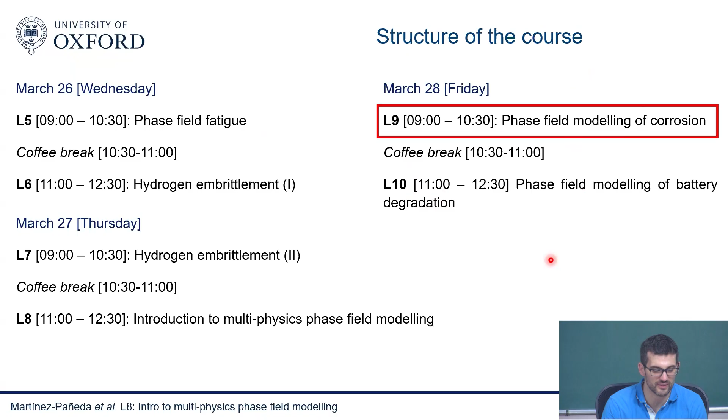Okay, so the motivation is clear. I think you all probably heard about corrosion. I have a lot of corrosion on my bike, and I've seen a few bikes corroded around here, so you probably have the same issues. So it's really, as I like to say, everyone's problem. Corrosion is a problem for all countries and all the people living on this planet. It has a massive societal cost. Globally, I think it's 5% of the GDP or something like this. It is quite a big number.

And the key point here that I want to emphasize is that it's a long-standing scientific and technological challenge. We've been working on this for a long time, mostly from an experimental point of view. We learned a lot about corrosion, but we still don't have ways of predicting corrosion failures. I always say that corrosion is a problem that has eluded computational scientists. We somehow understood some things about corrosion, but we're still unable to develop a predictive model that can tell us when corrosion failures will happen. This is the challenge. Even though we learned a lot, we haven't fully cracked this problem.

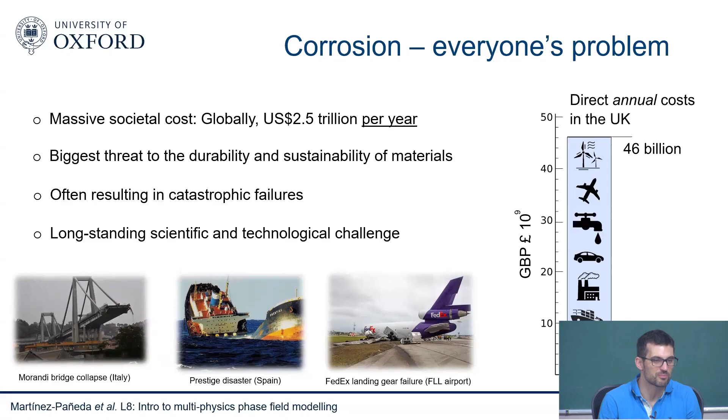This happened, for example, in Italy a few years ago, the Morandi Bridge collapse. So this is important. Again, corrosion is a problem that affects everyone. It doesn't matter how technologically advanced your country is, or your technologies are. You have corrosion failures, people die, and these things happen all the time, everywhere.

And the challenge here is that, of course, or one of the challenges, is that we need to extrapolate from the data. So what you see here in the sketch is the time to failure, and here's some sort of measure of the intensity of corrosion. It could be corrosion current density. And often, of course, things can fail over decades, as it happened with this bridge in Italy. But in our lab, we cannot do experiments over decades. That's far more than what a PhD student is willing to stay for.

So then we need to do accelerated tests. This is what we do. So this is our impressed corrosion current test. So this is an example of a classic accelerated corrosion test. So you basically enhance or maximize the severity of the corrosion process. For example, you are running tests at very high corrosion current densities, and therefore you get corrosion happening much earlier. But then you need to extrapolate all the way from here to here, and it seems that we keep overestimating when corrosion will happen, because it's a big extrapolation that we do there. So that is one of the main problems. We need to go from very fast experiments to other time scales.

And of course, the way we extrapolate is we get a bunch of data points, and we fit the data. So you can imagine here a time to failure versus applied current density as a function of two fitting parameters, alpha and beta, that appear magically there, and that we just calibrate with experiments. But we don't know what alpha means, we don't know what beta means. We just pick units a bit randomly. So this is the problem, right? It's not as easy. If we want to extrapolate from here to here, then we need to capture the physics. We need to understand what physical phenomena will be slowed down or accelerated as we lower our corrosion current density, and see how these things evolve in time.

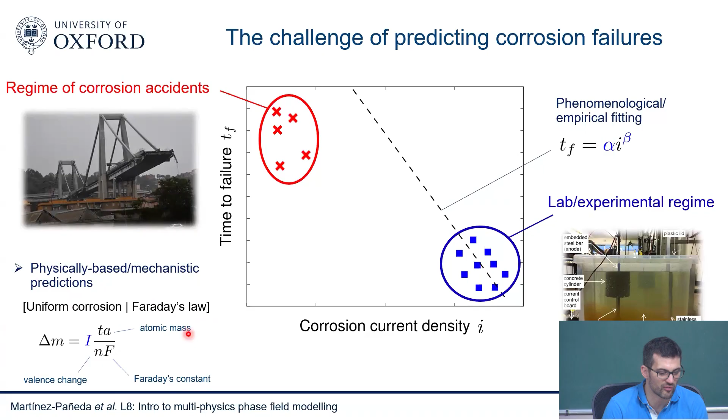So that's the challenge. We know that we need to replace these things by these things. We need to develop physically based predictions, but we need to develop physically based predictions for problems that are much more complicated than this one, right?

So the key takeaway is that, if you want to predict corrosion failures, if you need to extrapolate from here to here, then you need to explicitly resolve the underlying physical processes. You need models that rely purely on material parameters, physical parameters that you have full understanding with, and that will give you the confidence to go from a lab experiment that takes a few hours to a failure that occurs over decades. That's the idea.

That's the key takeaway. So, as I said before, what seems clear today is that we all seem to be in agreement, and everyone you ask in the corrosion science community will agree with you and say, okay, yeah, that's true. If you want to predict corrosion failures, you need to incorporate all the physics of corrosion. You need to develop models that do not rely on fitting parameters, because the fitting is going to take me to the wrong side, because different mechanisms are activated at different locations. There's rate-dependent phenomena and so on.

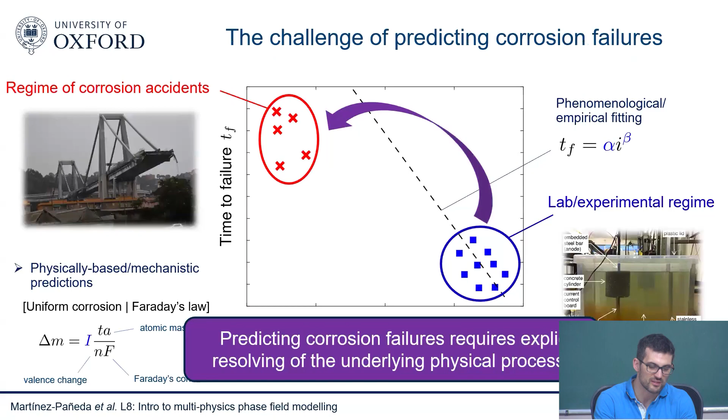So this is not going to work. The fitting is not going to work. We need something a bit more rigorous, a bit more mechanistic. This is the takeaway. So we need to be able to do that, and in order to do that, well, you need to resolve the physics.

So you think that a lot of things are happening. So you have some sort of electrolyte. It could be seawater. You have your metal, which is being subjected to some mechanical deformation. So there's mechanics in there. In the electrolyte, you have many ionic species that are diffusing through your electrolyte, similar to the hydrogen uptake problem that I was discussing in the seminar. You have many ionic species. Those species are moving around due to fluid flow, due to electromigration, due to diffusion.

There's an interface, there's a defect, some sort of defect, a pit, a crack between the electrolyte and the metal. There's a lot of things happening at the surface of that defect. You may have corrosion reaction, so you have metal ions being detached from the metal and moving away into the electrolyte. You may have absorption of hydrogen. We discussed this in the seminar. Hydrogen comes in and travels through the crystal lattice. It's attracted to areas of hydrostatic stress.

So again, everything is strongly coupled. The corrosion process, the dissolution of metal, is also impacted by the mechanical fields. You may have a passivation layer here that you're rupturing through your mechanical fields. So there's many, many things happening, all of them strongly coupled, and this is the challenge. This is the problem with corrosion. Many things are happening across disciplines: electrical fields, mechanical fields, chemical fields.

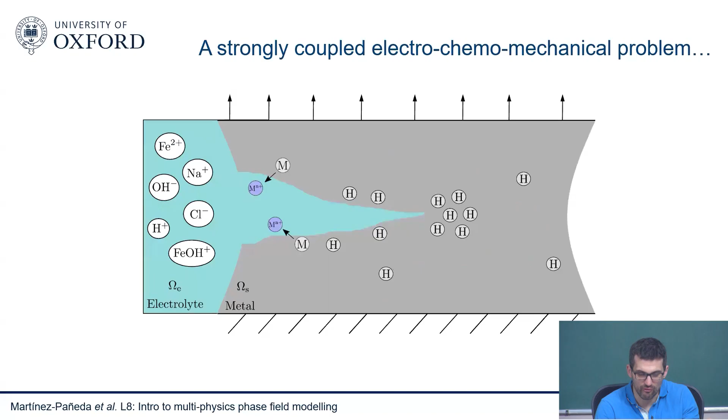And the good thing is that we know what are the differential equations that describe each of these phenomena. So the electrochemical community knows very well how to describe the electrochemistry of electrolytes. We discussed in the hydrogen seminar, they use Nernst-Planck and electroneutrality or Gauss law. So here you see the Nernst-Planck equation, for example. You can predict the transport of each of these ionic species, and each of them will be a degree of freedom in your finite element model.

So models can be a bit big, but you can see then you have the change in time as a function of transport due to fluid flow, diffusion, electromigration, and volume reactions. So these are well known, and these rely on parameters that we understand: diffusivity, temperature, Faraday's constant, and so on and so forth. So everything is physically based, mesoscale physically based. You're explicitly resolving the phenomena at play. And then you have some surface reactions as well, the formation of the material, hydrogen transport, whatever you need.

So we know each of the equations that describe each of these electrochemomechanical physical phenomena. And for the first time, we have enough computer power and coupled multiphysics algorithms that we can solve all of them. So we don't need to make any assumptions.

I was going to say that we didn't have any models for corrosion. That's not completely true. In the nuclear community, because they had to make some predictions, they used some sort of models, but they were all alpha-beta type of models. Not one there to resolve the electrochemistry, not one there to resolve surface reactions. It will be more: you apply this load, and then as a function of this time, something will happen. A little bit along those lines.

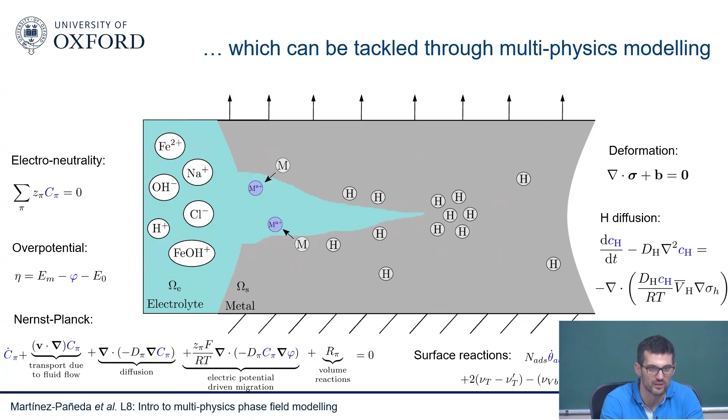Everything is very strongly coupled. So the way it changes in time will change the value of these guys, the value of the electric potential, the corrosive reaction, the uptake of hydrogen, and so on and so forth. Everything is very strongly coupled. Everything is important. You cannot just neglect one of these ingredients. In order to predict corrosion, you need to have everything in place. And you can see this here.

So this is, as I told you yesterday, the main issue with the durability, or the service life, of offshore wind turbines: corrosion fatigue. This is the limiting factor. And what happens typically is that you generate some pits at the interface between the electrolyte and the metal. Those pits will grow, driven basically by local chemistry and mechanics, and then eventually you get a pit-to-crack transition event, and then the propagation of fatigue cracks.

You can see here a microscope image, solid metal, the aqueous electrolyte, how you start with a pit and then eventually it becomes a crack. And this is a challenge because you can see that you have a very complex corrosion front, and everything, as I said, is strongly coupled. So as you know, of course, you are very familiar with mechanics. The sharper my pit is, the higher the stresses I will have ahead of my pit. The higher the stresses, the faster the corrosion will happen.

The sharper the pit is, also the more change in local electrochemical conditions I will see. So you'll go from a pH of 9, as you can see here, to 2. So there are changes of 80% in the pH and local electrochemical conditions from the bulk to the inside of the pit. So all of these things are very strongly coupled. The pit is growing due to mechanics, due to local chemistry, and the local chemistry and the local mechanics are themselves changing depending on the shape of your pit. So you cannot disconnect things. You have a problem that is strongly coupled, and you need to resolve everything that is happening there.

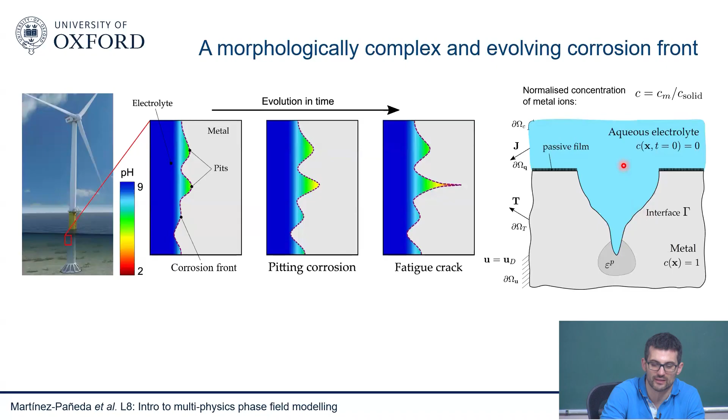But there will be a number at the interface, and they will travel along. And at the beginning, of course, you have 0 in the electrolyte. This is the quantity that you need to describe corrosion mathematically. The simplest model is a normalized concentration equal to 1 in the metal. As you generate metal ions due to corrosion, those detached metal atoms travel through the electrolyte and distribute within it.

What happens in corrosion is that we have two scenarios. One is called activation controlled corrosion. The other one is called diffusion controlled corrosion. In activation controlled corrosion, we know that the velocity of the pit is governed by Faraday's second law. So you have the corrosion current density, Faraday's constant, the concentration of the solid, and so on. This is an equation that has a clear physical meaning.

This gives you how fast your pit grows. And here you have a Rankine-Hugoniot condition, which tells you the concentration of metal ions at the interface, the CM, which you can normalize by C solid. When you have diffusion controlled corrosion, you have saturated your interface with metal ions, so you need those metal ions to go away before you continue to corrode your sample. Then the concentration at the interface is given by a Dirichlet boundary condition, the saturation concentration, a known material property, and the velocity of the corrosion front is obtained from the Rankine-Hugoniot condition by substituting the saturated concentration.

So you can see why modeling this is very challenging. You have an evolving interface where you need to prescribe Neumann and Dirichlet boundary conditions that are changing in both time and space. This is essentially a mathematical nightmare. Some people have published a few papers using some techniques, but only for very simple problems; it's really a nasty problem. So here is where we think phase field can come to the rescue and make a big difference.

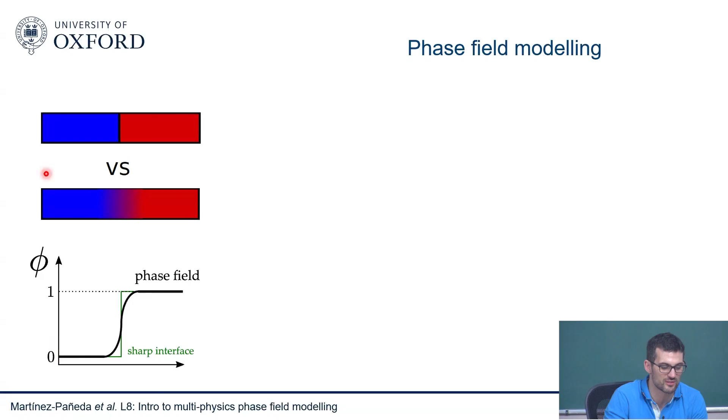But again, we can describe the corrosion front with phase field, and then if we do that, we need to think of a differential equation for the evolution of the phase field. But once that's done, we can capture the evolution of the corrosion front easily. And again, to emphasize the point, we will be solving the interface equation in the entire domain, so there will be no need for special treatment. If pits grow, branch, coalesce with each other, all of those things will be naturally captured without any need for any specific conditions, any criteria.

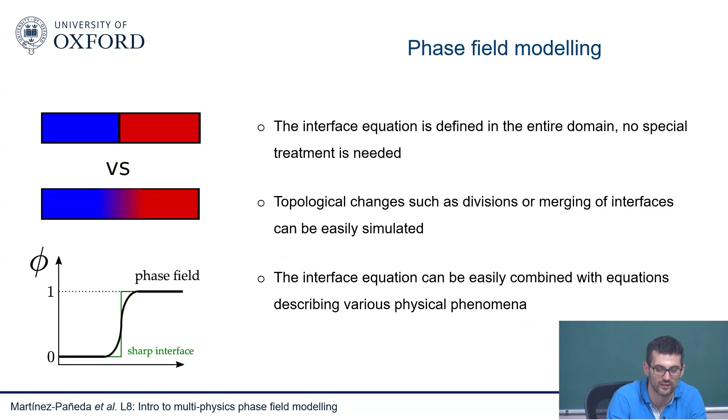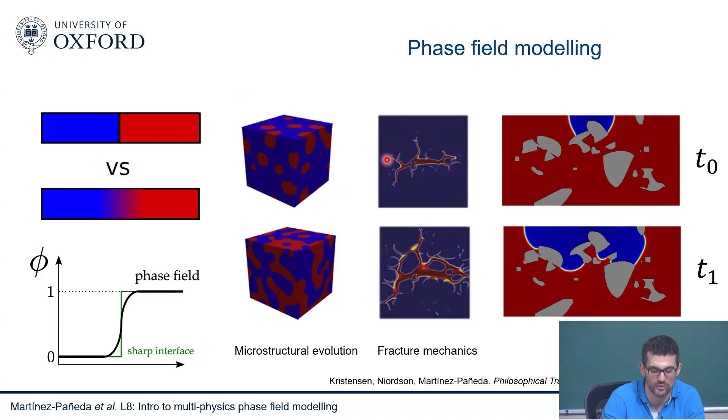And then again, critical of course to corrosion, we will be able to solve the interface equation in combination with other equations describing other physical phenomena. So we can solve it with all those equations I showed you before, right? The transport of hydrogen, the transport of ionic species in the electrolyte, and so on and so forth. And so, once again, corrosion is a relatively new application of phase field, but I do expect to see a revolution in the same way that we have seen in the solidification community and in the fracture mechanics community. So again, a good area to start working on, I think.

And then the idea is, as you see here, you have basically now the two variables that I mentioned before. So you have the concentration of metal ions, which is 1 in the metal, and then it starts going towards 0. And then you have the corrosion front, which is described by the phase field, which takes a value of 0 in the aqueous electrolyte, so in the seawater, and 1 in the metal.

And I was invited to submit a paper to MRS Bulletin, where they were putting together papers from people working on various fronts of corrosion and phase field, and they wanted me to put an application for phase field corrosion. And there I described the state of the art of the field and some opportunities for future progress. It's been growing dramatically in the past 1-2 years, but it's a relatively new field.

I think the first papers, it's a bit difficult with these things to determine what was the first paper, because there were multiple papers progressing in that direction, but probably there's one in Sweden from Per Stahl and a group in Ohio State in the US as well, more or less. I think there's a group in Hong Kong a bit later. There's multiple groups doing things at the same time. And we were, I think, the first in bringing mechanics into the picture. But anyway, a new field, I would say, but very promising and growing quite fast.

So what do you do then? You have corrosion. I'm going to bring mechanics, I'm going to bring other things into the picture, but I want to bring them progressively. So if I think of the simplest problem of corrosion, you have basically two variables that you need to solve for, or two equations. One is the transport of metal ions that I was discussing before. This is what I'm solving here. So it's a kind of Fick's law type of equation, transport equation.

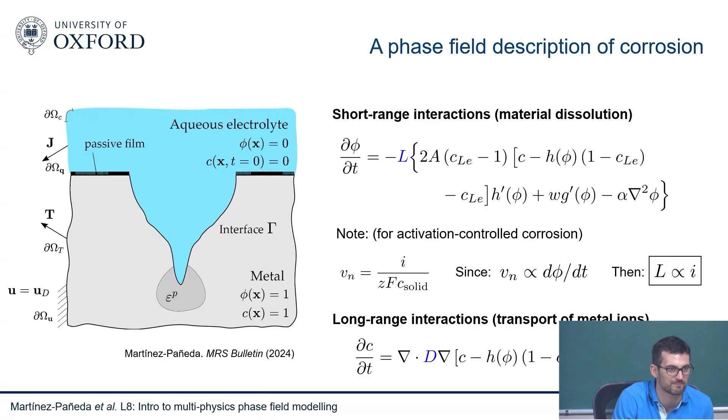So I'm going to show you a little bit how this model works, with a very classic benchmark, which is the pencil electrode test. Here you have basically a bar of metal, exposed to a solution and covered by an epoxy. So this is basically a 1D problem. You have 1D corrosion: the metal losing atoms, reducing its size, and the solution progressing. This is the outcome of your finite element simulation. We solved this with COMSOL, Abaqus, and other tools.

On the left, you see how the phase field evolves in time. It captures what you expect: as you corrode your sample, the corrosion front progresses. And this is the concentration of metal ions, which goes from the one in the metal to the saturated concentration at the interface, and then there's transport into the electrolyte, and it's zero or close to zero very far away. So this is the behavior that you expect, and in finite elements you're able to capture how the corrosion front evolves.

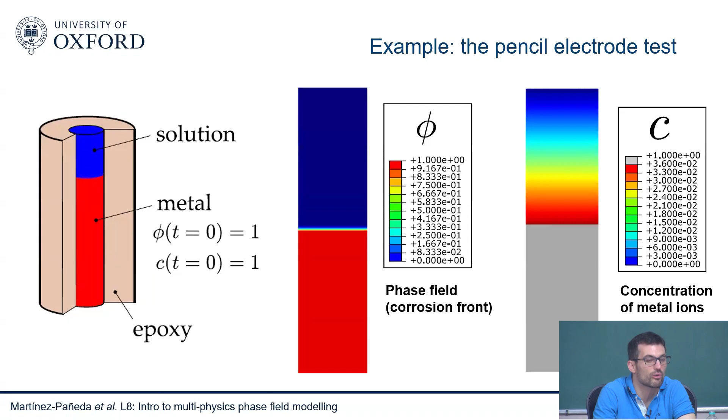And we can also show, and this is quite important, that the model can naturally capture the transition from activation control corrosion to diffusion control corrosion. Remember that we have these two scenarios. The other few models that were there, they had to have a condition where they say, oh, now at this point I'm going to switch. And this was also part of the mess, right? How do you switch these boundary conditions and so on? Here, the model can capture this naturally.

So you can see here, this is the pit depth versus time. This linear behavior is typical of activation control corrosion. But as I ramp up my corrosion current density by ramping up my mobility coefficient, you can see that you get into this parabolic behavior that is typical of diffusion control corrosion. And when you are in the diffusion control corrosion regime, you can see that the parameter that matters, what changes the predictions, will be a change in the diffusivity.

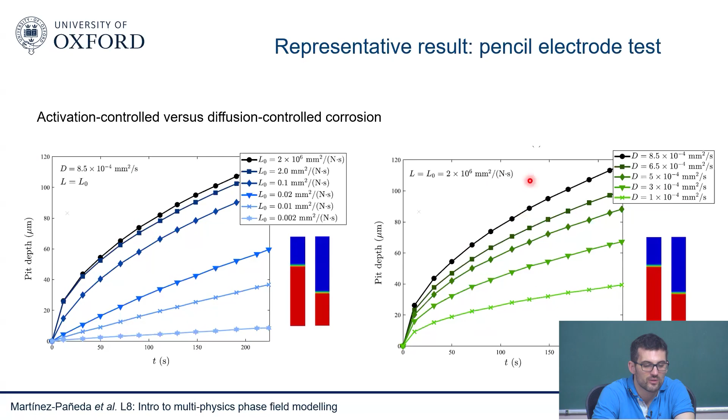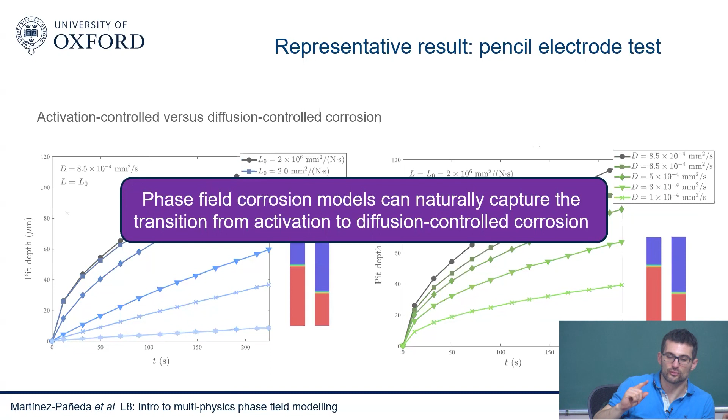This is the idea. So yeah, an important key takeaway, these phase field corrosion models, by solving these kind of Allen-Cahn and Cahn-Hilliard equations, they can naturally capture the transition from activation to diffusion control corrosion. This is an important takeaway. But then, of course,

people in corrosion, again, they said, corrosion is a very complicated problem. There's many things happening. You will never be able to solve this with computers. And they have a fair point. Corrosion is indeed a very complicated problem. But what I will try to show you over the next minutes is that these, at the end of the day, are finite element models. We understand what are the PDEs that describe, at the mesoscale in the continuum, what is happening with each of these phenomena, so we can incorporate these phenomena.

And things that people will mention, they will say, okay, from a computational perspective, this is very tricky because you need to handle secondary phases that will not corrode, insoluble secondary phases. We can do that. You can see here how this corrosion front is evolving. These are calculations from our group handling those insoluble secondary phases. They say, oh, you have a lot of pits that can interact. It's very complicated. Well, that comes for free with phase field. You can capture the interaction between multiple pits, no problem.

Sometimes you have sensitized grain boundaries, so corrosion will happen along the grain boundaries. Again, no problem. You can simulate intergranular corrosion. You have various techniques to interpolate properties in space, and you can say, my corrosion resistance, so to say, in my grain boundaries in this case is going to be weaker than in the bulk. So corrosion might be favored in the grain boundaries.

And you can see also we can do 3D. There's a lot of discussion going on now because of XCT synchrotron experiments where people are seeing interesting effects in terms of how the pits grow and how the pits interact with each other. And using our corrosion capabilities, we can capture precisely that pit interaction. So I think the models are powerful. The computational challenges have been addressed, and I think this is what gives us an opportunity to resolve all the complexity that comes with corrosion problems.

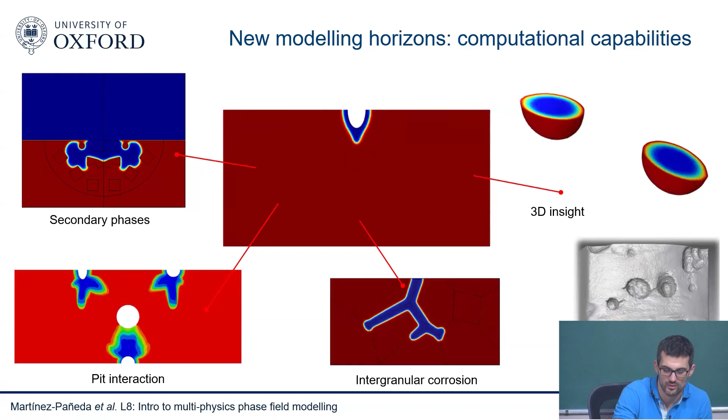Microstructure anisotropy, this can play a role, particularly when you're nucleating or growing a small pit. Again, you can incorporate this. You can solve this with different microstructures, with crystal plasticity. You can couple this with an EBSD map. You have mechanics as well. Of course, mechanics plays a big role in film rupture, but in other problems as well. You can also incorporate this.

So you may have a phase field for the evolution of the corrosion front and one for the formation of other products. So that's something that you can also resolve. You may also have hydrogen. All the problems that I mentioned with hydrogen come in through corrosive reactions. So everything that we discussed in the seminar about hydrogen will happen here as well.

Hydrogen uptake will happen in this corrosive environment. It will embrittle your toughness ahead of your crack tip. And that will depend, of course, also on the electrochemistry of the electrolyte. Again, you can couple all of these things. So let me tell you a little bit of the ingredients that we have incorporated into the model.

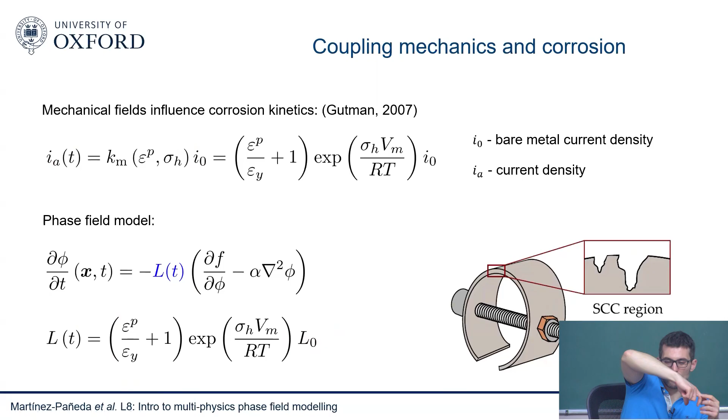So this C-ring test is a test where you have a bolt or a screw, and then you just tighten that screw and basically consider different load conditions. So it's a constant load, but you can play around and see different loading configurations. And you can measure here at the top what is the growth of the stress corrosion cracking region. So this is what you get from the experiments.

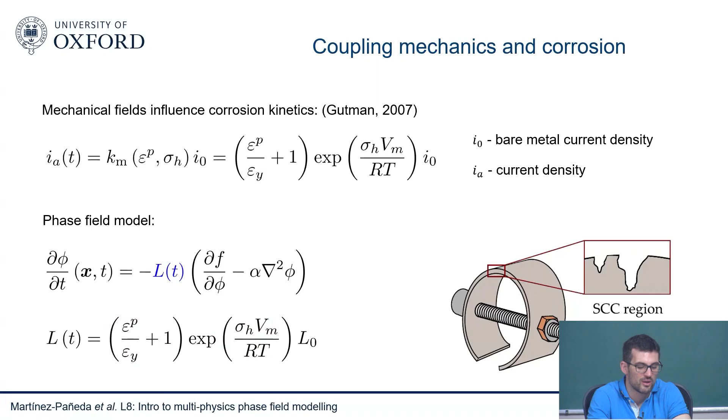This is the yield strain, so yield stress divided by Young's modulus. This is the plastic strain that comes from the finite elements. This is the equivalent plastic strain. This is the hydrostatic stress, partial molar volume I know, temperature I know, gas constant I know. So there's really no fitting whatsoever, and you can see that the model seems to be doing a good job at capturing the evolution of the corrosion front in time.

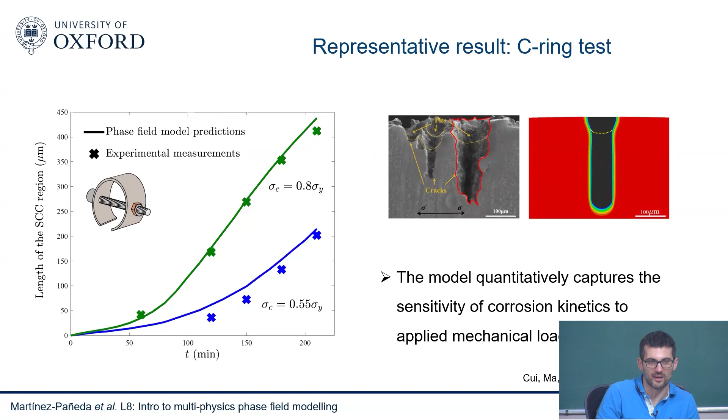So I think it's fair to say that the model quantitatively captured the sensitivity of corrosion kinetics to applied mechanical load. So that's one ingredient, and we were happy with that. The other ingredient, and maybe the most relevant, is this film rupture dissolution repassivation that you guys were asking about. So what do we do when we have corrosion problems? We either try to protect our structures from corroding, or if we have enough money, we use corrosion-resistant materials, for example stainless steels.

In stainless steels, we have chromium, and this chromium will automatically generate a passivation layer that will prevent your material from further corroding. But if you rupture that passivation layer for whatever reason, you may have some ions or mechanical fields that are able to rupture the layer, then you get localized corrosion. And localized corrosion is pretty bad because it's very difficult to detect, and it leads to pits, stress concentrators, regions where your electrochemistry changes, and that leads to cracks, and so on. So localized corrosion is a big problem, and responsible for many of the failures that I showed you before.

And what happens here is kind of a cyclic process. You have your stainless steel, which forms this passivation layer. Let's assume that something disrupts that layer. Your corrosion current density is at a maximum. You have no passive film. You are losing metal significantly. As your film starts to deposit, you reduce the corrosion current density, and your corrosion process starts to wind down. But then eventually you rupture your passive film again, you get exposure again, and you start repassivating again.

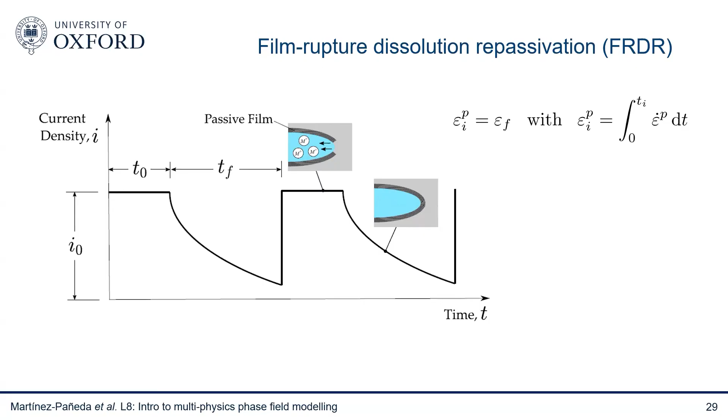So you have your passivation film. You can think of it as a paint. You start pulling, you apply some mechanical load. Eventually, you get to a critical strain or stress or whatever failure criteria you want to take. People in this community seem to like the idea of picking a failure strain, and they seem to think that they have a good grasp of what this failure strain should be. But once you reach that failure strain, this thing will rupture, and then you get more corrosion.

This thing ruptures, you get more corrosion, but again, you quickly start forming the film again. But now it's like you're applying a new paint. So this new paint has never seen any applied load yet. It's a completely new paint. So the cyclic process starts again.

So you're doing an experiment where you're progressively increasing your load, you rupture a film, you progress your corrosion front. Now you are depositing a film again, but this film hasn't seen all the history before. It's like you applied a new paint. So the counting of the critical strain starts again. This is what this integral represents, right?

So here we rupture the film. We start depositing a new film, but this new film has not seen the previous loading history. So what matters for this new film is the strain since we started depositing the film. So this is a cyclic process.

And then how quickly the corrosion will progress will depend on your loading rate, how quickly you apply your load, how quickly you accumulate that critical strain over the new paint, over the new film, versus how quickly you repassivate that film. That is the idea. So it's an interplay between passivation and straining kinetics.

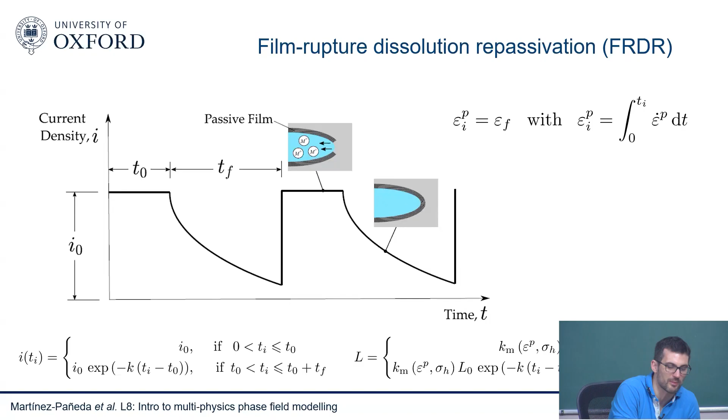We seem to be able to predict what happens in the experiments with this kind of phenomenological approach, but it will be better to have something a bit more mechanistic in all the stages described. But anyway, this was the first attempt, and what we saw, of course, was that we were able to capture the interplay between repassivation and straining kinetics, and we were able to capture, as you can see here, the transition from pit to a crack, basically. This kind of pit to crack transition that the community have been trying to simulate for decades.

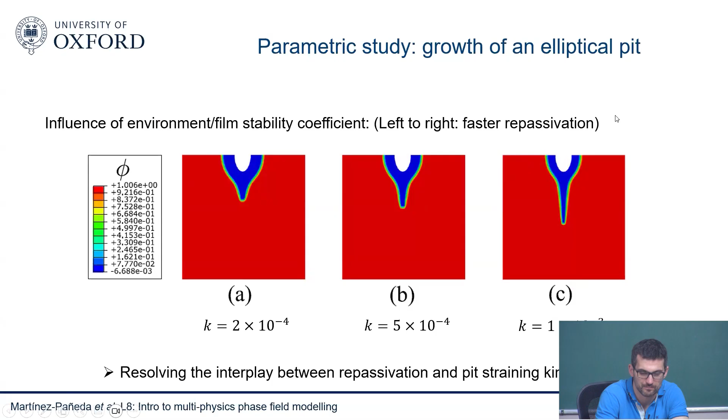The other aspect is the role of the microstructure. So we want to develop microstructure sensitive predictions, and we know that there's two effects of microstructure. One is the mechanical crystal properties will change in space. There will be an anisotropy dependence related to the grains that you're having. But also, the corrosion rates are shown to be sensitive to the crystallographic anisotropy. So they vary something along what you see here. So the idea is to incorporate this into the model.

To do that, we develop, I would say, a mechanics and microstructure sensitive phase field mobility coefficient. So you have here the mechanical term. Now you consider Butler-Volmer kinetics, and you define the overpotential as a function of a grain orientation dependent corrosion potential. So Butler-Volmer kinetics are very typical in these kind of electrochemical problems. And then the idea is that you have an overpotential, and in that overpotential, you bring in a grain orientation dependent corrosion potential.

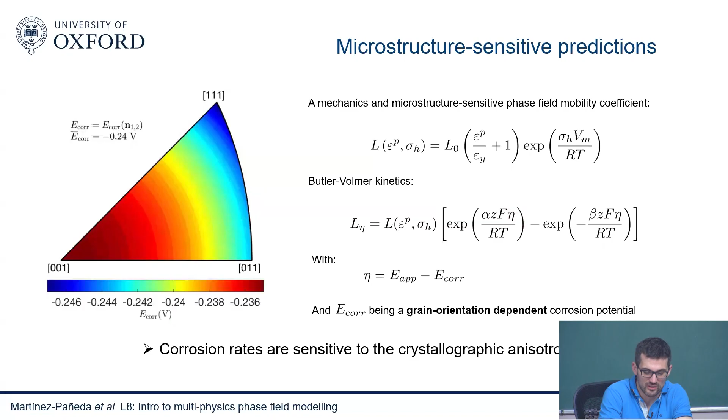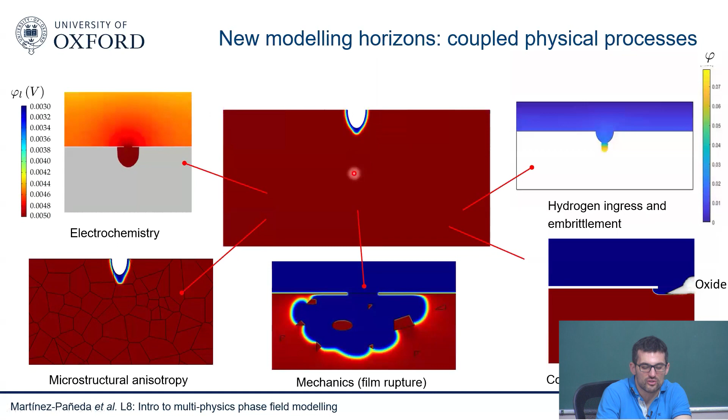And this is the dependency, which is based on experiments, basically. They did some experiments for different orientations, and they measure the degree of corrosion, and you can fit those experiments. You can determine what is your grain orientation, and then you can bring this into the picture. And then when you do that, this problem here is a pit growing into something that is loaded uniaxially, so it's very similar to this one here. You can see that in the case of isotropic, this defect just grows in a symmetric way, but of course this breaks down the moment you're doing some sort of microstructural anisotropy. So you capture the effect of microstructural anisotropy.

And this for us was important. This is evolution of the pit as well. You need to do multiple simulations with different sort of RVEs, so to say. They're not really RVEs, but these representative domains where you can play around. You can do different grain boundaries or different grain sizes and so on and so forth. And you need to run multiple calculations just to account for some sort of statistical scatter. And what we learned, the things that we were interested in, is first, we wanted to map the regimes of microstructural influence. So when do we need a model as complicated as this one? And when can we get away with an isotropic model? And this is what we did.

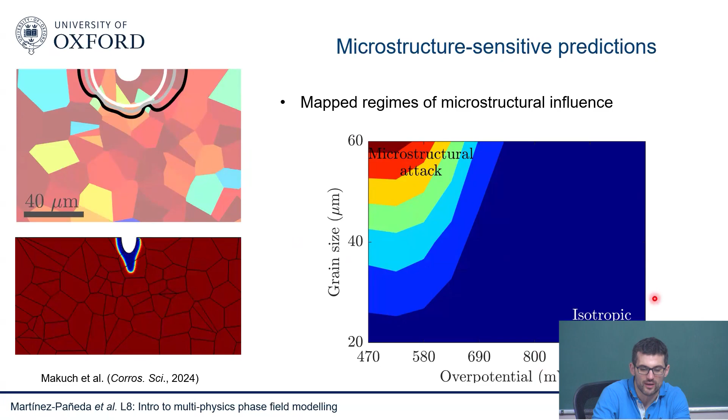So that depends on many things. Among others, the size of your pit, if your pit is much larger than your grain size, or the overpotential, the conditions where you have more activation versus diffusion controlled corrosion. But this was the idea. We tried to build maps that look like this one, where you basically understand in which cases you have some sort of microstructural dependence, and in which cases you can get away with a simpler model. And then other things that we learned was that the corrosion potential anisotropy dominates over mechanical anisotropy and grain size effects.

And we also use this with a group in the US, in Notre Dame. We're trying to understand what is the effect of additive manufacturing, metal 3D printing, right? So how can additive manufacturing microstructures lead to more complex and more acute corrosion? So we know that the microstructures are going to be very different. We know that there's a little bit more susceptibility to corrosion, so we can input those microstructures and understand why they are a bit more susceptible to corrosion.